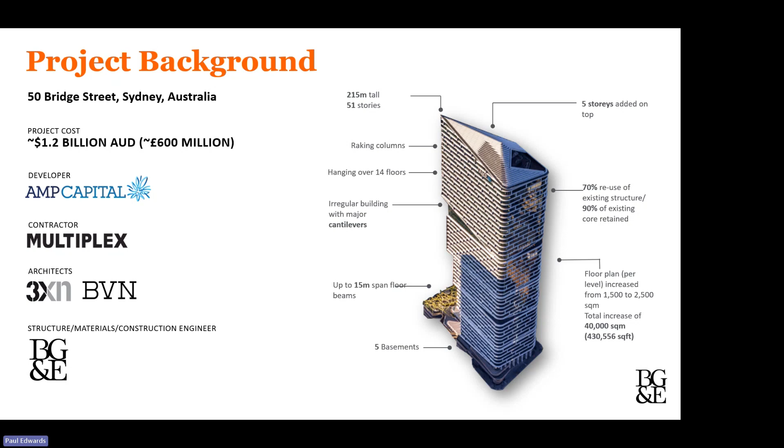So 215 meters tall at its completed state, 51 stories. And the project ended up adding about 40,000 additional square meters to the footprint of the building, whilst retaining 70% of the existing structure. Now, the existing building was completed in 1976 as 50 Bridge Street, always for, in effect, AMP Capital, so always for the same client who then operated it for the following 50 odd years. And you can see more or less the difference between the previous building and the now new building, to give you some idea.

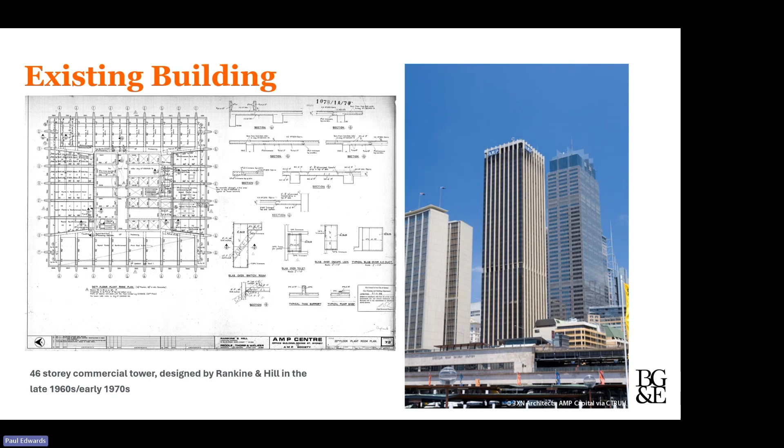So the existing building, what was, or is it? Because most of it's still in place. So the building was designed by an Australian practice called Rankine and Hill in the late 1960s and early 1970s as a 46-story commercial tower, again for AMP. And the structural form was a rectangular in situ concrete core with perimeter columns, in situ beams spanning between the core and the columns, and the floor plate constructed from planks with structural topping.

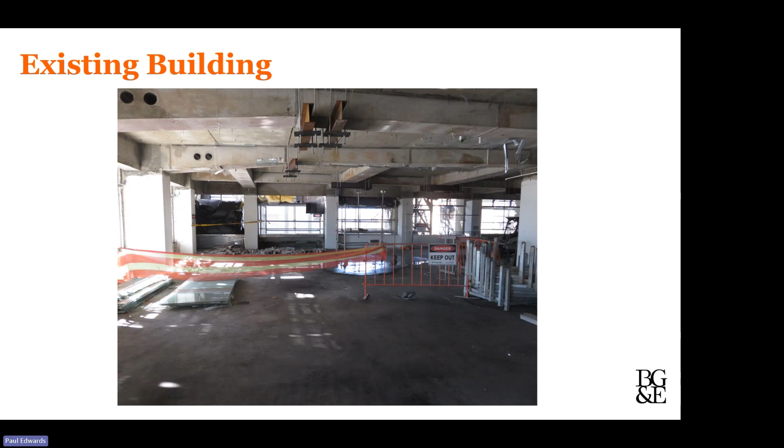Just some images to show you the condition of the existing building once the soft strip had been undertaken. First site. So you can see the downstand beams, you can see overall floor heights, giving an impression of those quite tight. Areas where some coring could occur to allow for services to pass through. And again, the further details are showing where the precast planks landed on the in situ beams. Some areas were double height to allow for an atrium.

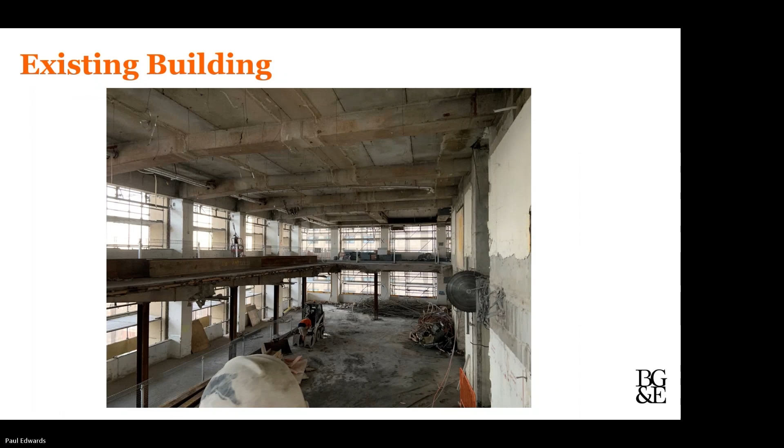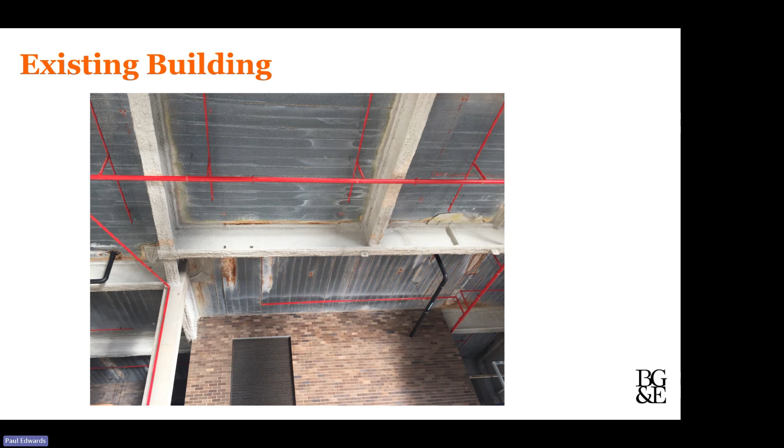And then the upper levels had some steelwork with metal decking floor slabs. You can see some mild water ingress, but given the life of the building over 40 years, nothing particularly significant. From those photos, I think one might take the impression that the overall condition of the building was reasonable. Didn't seem to be any significant signs of distress. We'll go into some of the findings as we get through this.

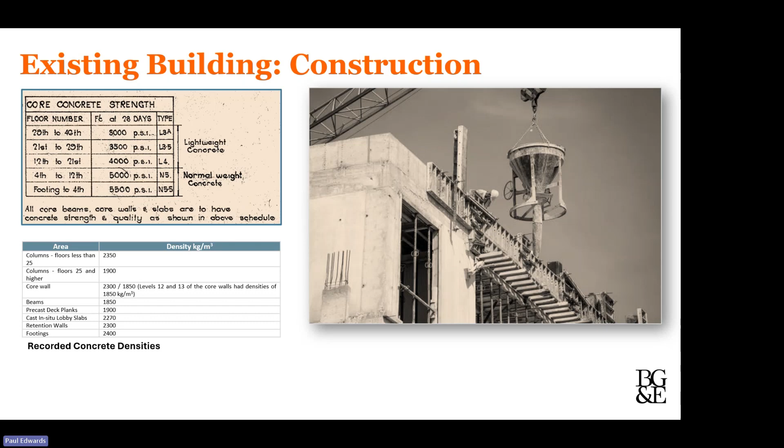So the original construction, now maybe when we're constructing buildings like this, we might be pumping concrete a lot more, but the actual tower itself was built using a kibble bucket process, example shown to the right. And the other interesting element was that the core walls changed both in design strength of the concrete, but also in moving from normal weight concrete towards the bottom to lightweight concrete towards the top. So you can see that there's a change in materials, and all of this would have been constructed with the use of a kibble bucket rather than pumping or anything else that we might be doing at the moment.

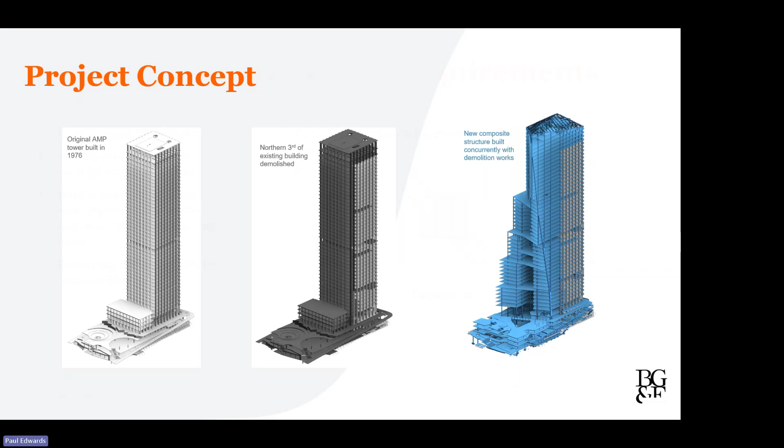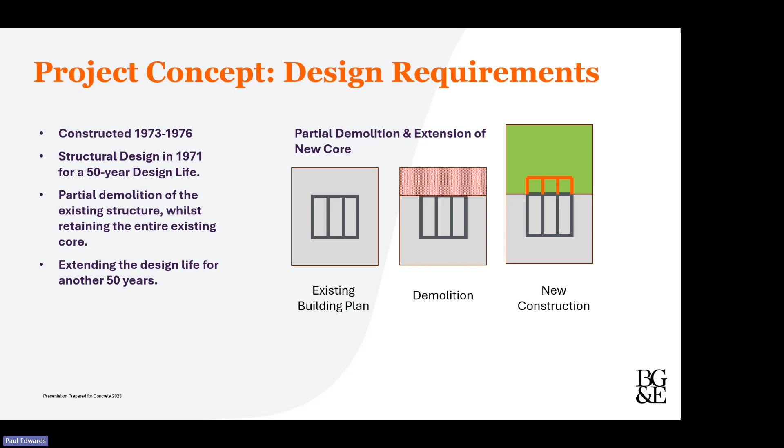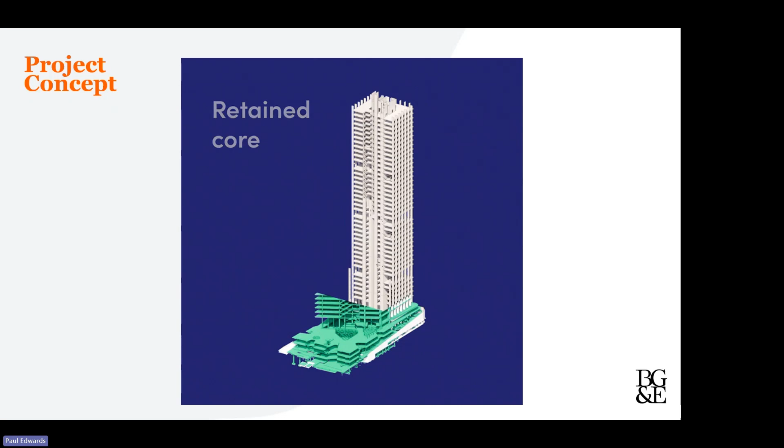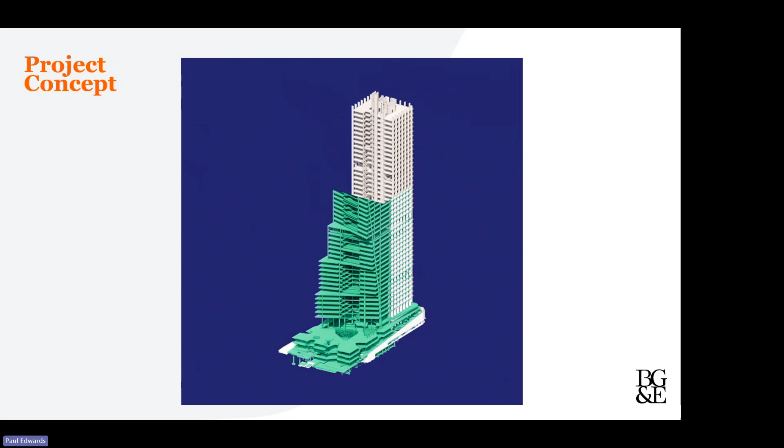The goal of the project, as well as increasing the floor area, was to give the building an additional 50 years of design life, and the retention involved extending the core. So I'll talk a little bit more about those two things as I go through. And again, not really a time lapse, but just a nice image of this overall project, just to visualize it a bit better. And I'll talk a little bit about some of the details about how we achieved that.

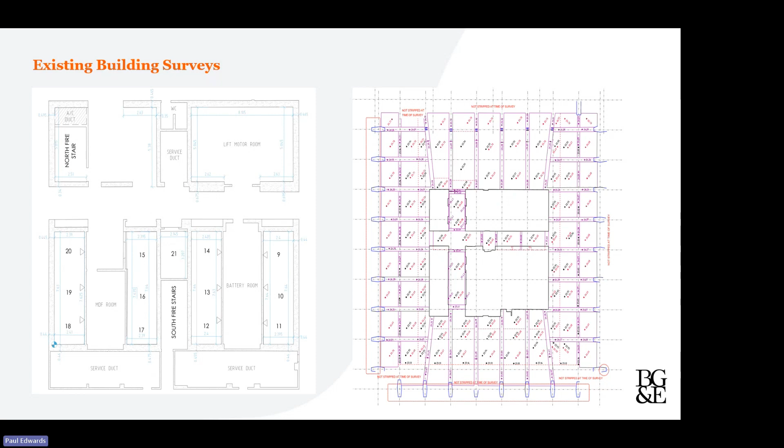So, existing building investigation. There was reasonable existing building information in terms of drawings available, but we took full 2D surveys of all the floors, all the building, and also undertook 3D point clouds. I'm not going to go into a lot of detail, but this survey information was used to help us develop an existing building model, which we used to develop and generate construction sequences and building movements. So it was quite an important first step, and I'll show some of that towards the end.

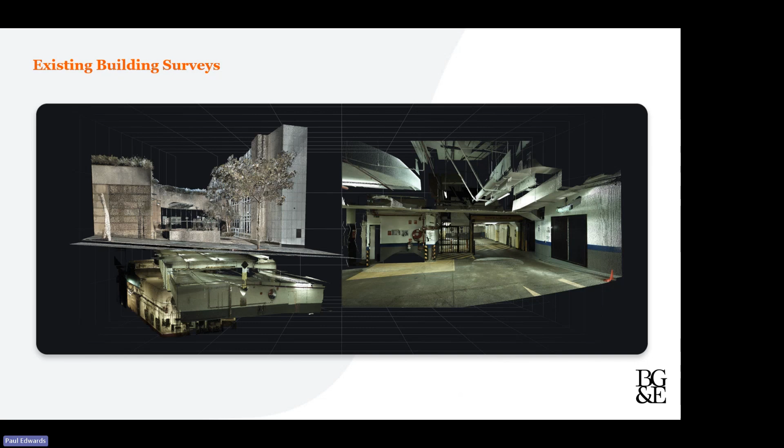If you were going to keep 70% of the existing structure from a building built in the early 1970s, a lot of the work necessary was to understand the condition and capability of that existing retained material. Typically, characteristic compressive strengths for a new build are determined using cubes or cylinders of the concrete mixes specified when they get brought onto site. In an existing building, that concrete's already there, so you can't store samples in relevant conditions and test them as you go. You've got to try and understand how close to what it needs to be it actually is.

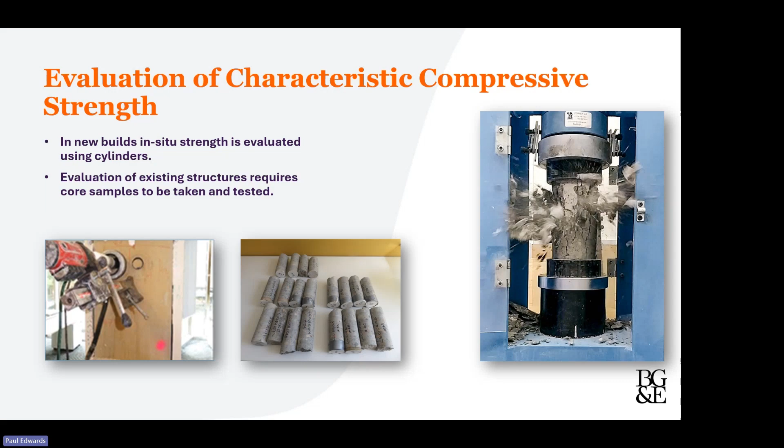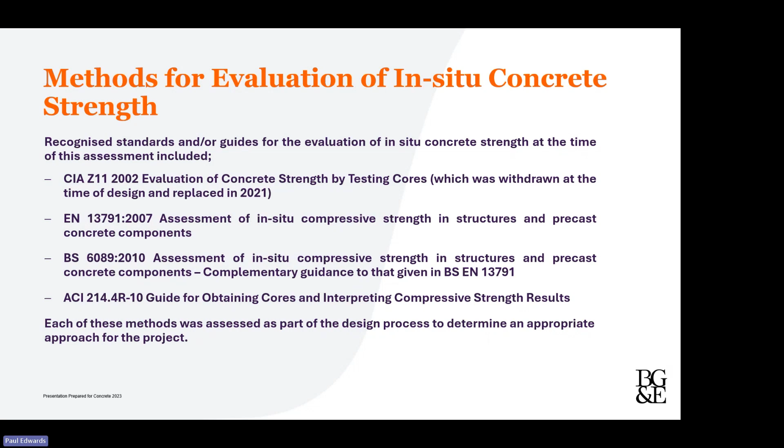At the time this was undertaken, and some of these standards have moved on, there were various standards available to the designer to understand the existing strength of the material. The design team evaluated these 4 codes for assessing the existing material, and having evaluated all 4 of them, the consideration was that the approach outlined in ACI 214 was the most relevant. The reasons are there on the slide, but it was felt that the ACI 214 approach offered the most sensible way of harnessing the existing concrete information gained from site investigation.

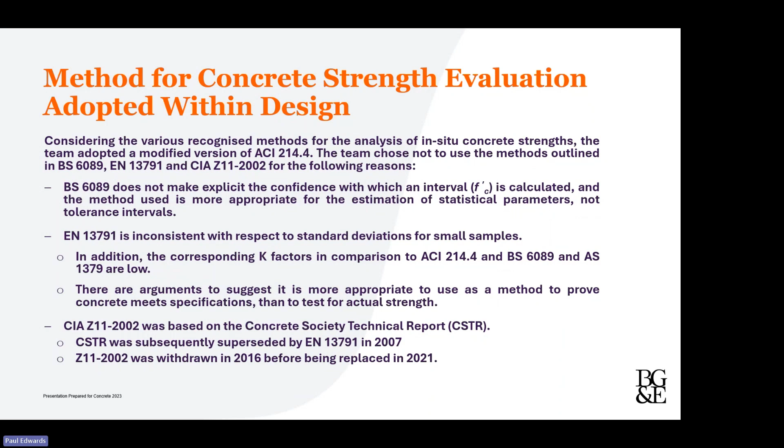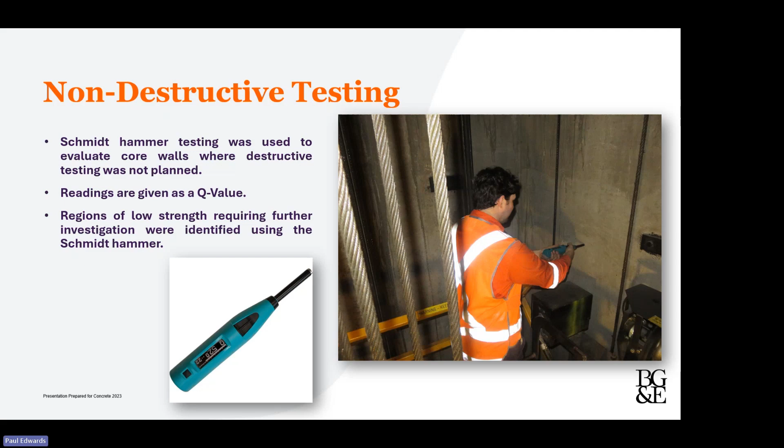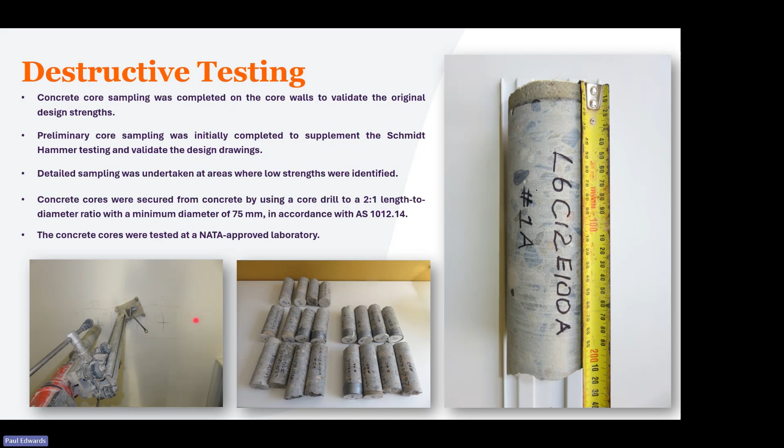Having identified relatively quickly an overview of the concrete compressive strength from the Schmidt hammer testing data, it was possible to then focus destructive testing. So representative concrete core samples were taken throughout the building, and further cores were taken following non-destructive tests to indicate areas of potential weakness. These cores were taken both to calibrate and to further identify low strength areas.

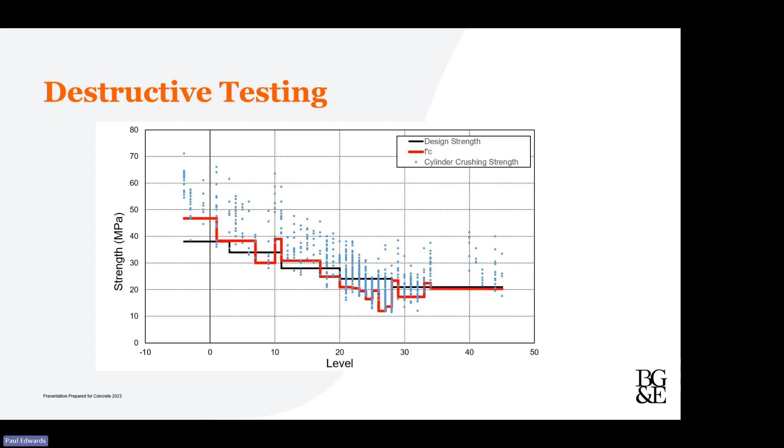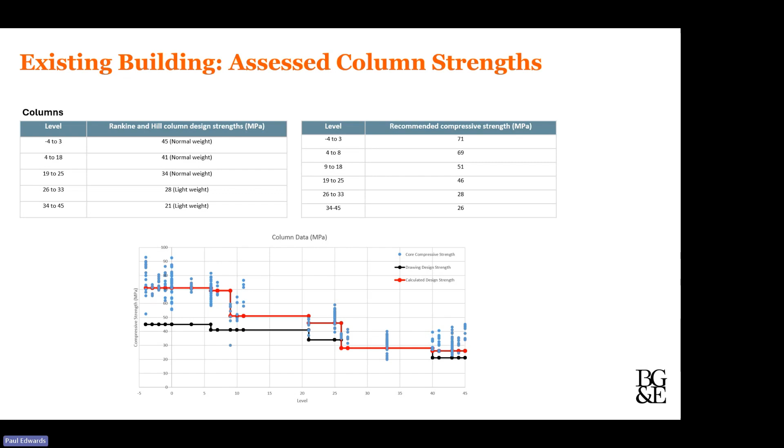This approach in general was adopted for all structural elements. So concrete columns were assessed, and you can see in the table on the left the original design requirements for the concrete strength, and you can see in the table on the right that actually determined by the investigation. And generally, as far as the columns were concerned, either at or above the original building's desired material properties.

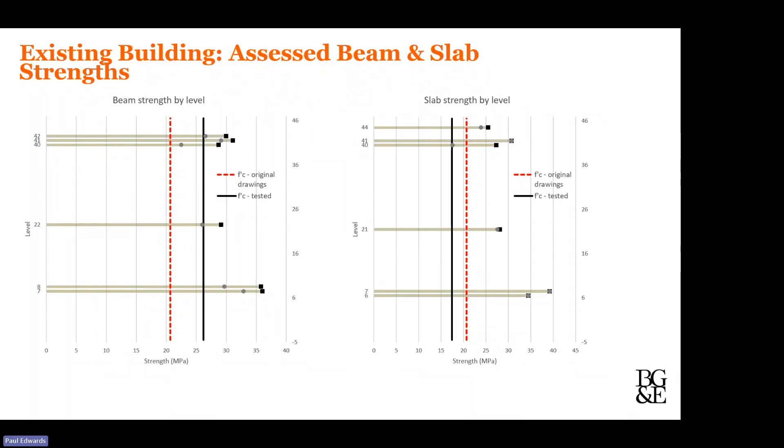Same story for beams and slabs. Generally, the existing material in the beams and slabs was found to be above minimum requirements, in some instances by a fair margin. But in terms of the cores, that core wall of which the whole core was retained, that story sadly wasn't carried through. And it's worth bearing in mind that all of this comparison with the original design strength is before any of the changes in load due to the new, taller, larger scheme come into effect.

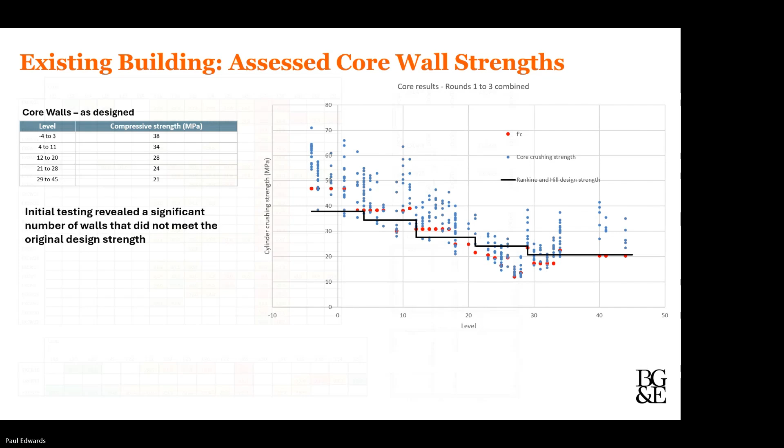So the investigation into the existing building revealed that actually the in situ strength of the material was below that identified as being necessary in the original design. And you can see in the chart everything below the black line, all those red dots below the black line, the f'c, resulting again from the ACI 214 approach, being areas where the concrete wasn't at the relevant level of strength. So the implications of that were relatively significant.

A zone in the mid-height of the building, where the compressive strength of the concrete isn't up to scratch, knowing that we're then going to add another 5 stories to it and increase the floor area with the associated increase in wind loads, for example. Quite a significant finding.

What then did we do? So it's worth bearing in mind that the first pass of both the non-destructive and destructive testing were done in a representative manner. So you're talking approximately, in terms of Schmidt hammer, 10 to 12 tests per wall, and then in terms of the cylinders for destructive testing that were taken out, maybe 1 or 2 on each floor level.

The decision was, if we'd have just left it at that in terms of trying to understand the existing material, the resultant costs to the project of reinforcing the core walls to achieve the desired strengths of the new build project would have been significant. You'd have been talking about 15 stories where each core wall would need to be strengthened either by steel jacketing in most instances, and maybe also, where tension was an issue, carbon fiber plating. The costs of that would have been tens of millions of Australian dollars, which is quite a large increase in the overall budget.

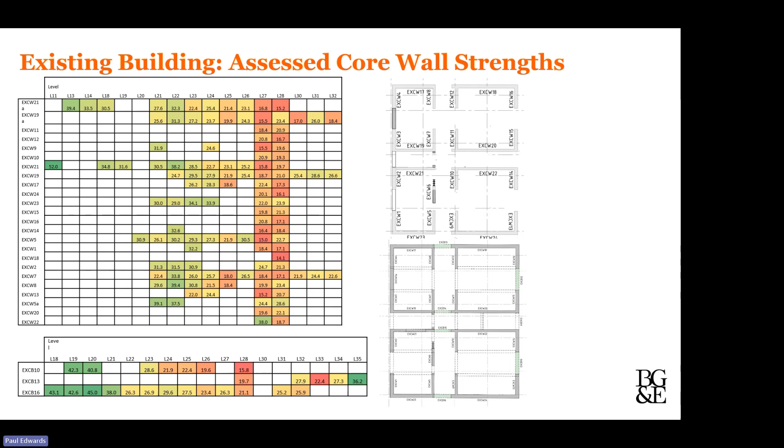So the decision was made to undertake a much deeper assessment of the existing concrete walls to try and understand exactly what the minimum level of intervention would be to achieve the desired overall strength of the existing core. And this table starts to pick up some of that more detailed investigation where you can see some of the identified destructive core strengths developed and starting to focus down a lot more on just a couple of floors rather than a group of 10 to 15 floors.

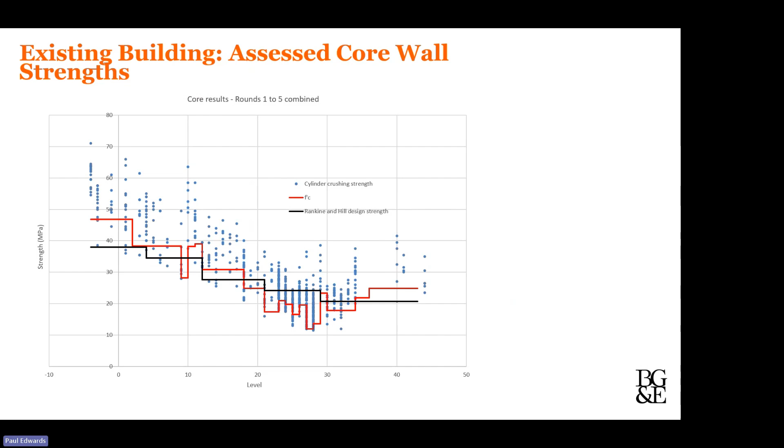And again, this is a similar repeat to the graph before, but with 2 more rounds of testing added to it. So just justifying further the areas where interventions might be made, and again honing in on those levels in the mid above level 25, where significant intervention might still need to be made.

And this comes back to some of the survey information, but in parallel to all of the investigations that were being undertaken, the overall design of the project was progressing, and as part of that, the structural engineers built an ETABS model of the existing building as a starter, and we're using that model both to understand the existing stress and strain and compressive loading of the building in its existing form, but then also to understand what the implications would be through the interventions proposed.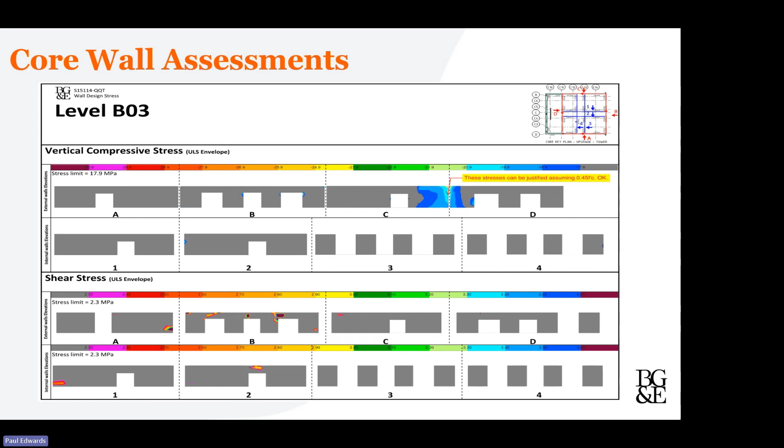Why was this? Having spoken to the team who delivered the project a few years ago, the consideration was really to do with the method of construction and the fact that that kibble bucket approach, although commonly used at the time and still used now sometimes depending on the scenario, can be harder to ensure quality control of delivery of the material, and then compaction and everything else. So it seemed someone was having an off day when they were pouring levels 27 and 28, where consistently the concrete supplied in the building was poor.

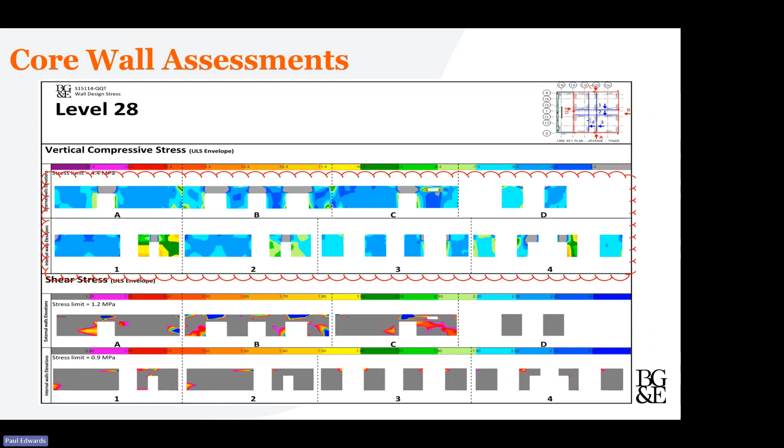There were some other issues found due to the non-destructive and destructive testing. The perimeter columns were formed from elements of precast concrete, which were then infilled. Well, I say infilled, but one common area of concern found was that the infilling of the precast around the columns wasn't undertaken very well. So there are large numbers of column voids found, and you can see some images here of the nature of what was actually found.

This was discovered by drilling a small hole into the precast concrete and finding that there were voids. Once the voids were found, it was decided to saw cut off one face of the precast concrete to understand the nature inside. And you see what you can see here. There's obviously been issues in pouring and compacting the concrete well, leading to significant voids in the precast column molds.

Which is obviously not desirable. This was simply rectified using, in effect, a concrete replacement for the new columns and then covering them up. Relatively simple once you've understood the issue is there to resolve, but it's worthwhile as a note for anyone engaging in adaptive reuse or existing building survey where there may be elements of precast concrete, to think whether that precast is there just to achieve an external finish and is hollow. And if that is the case, then maybe the internal is worth trying to understand as well, because there may be voids due to how that element was constructed.

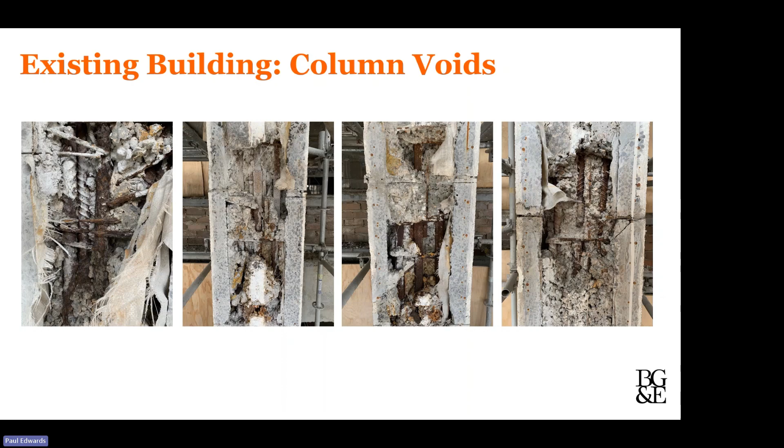Given that one of the requirements on the design team was to justify the building for a further 50 years, that meant it was necessary to understand not just the condition, but also how the building was constructed, and to understand how close it was both to the requirements of the incumbent design code at the time of its construction, but also in relation to what would now be considered relevant 50 years on.

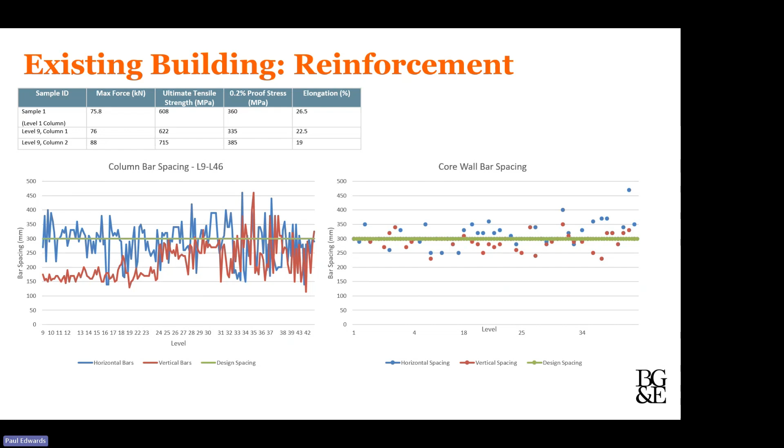So the team undertook assessments of the existing reinforcement, both to understand grade, but also to understand spacing and lap distances. This was done using calibrated cover meters for columns and cores, and generally in one or two areas, but generally everything was found to be acceptable and in accordance with design standards as far as that was concerned.

It was also necessary to assess carbonation rates. We want to keep 70% of the building for the next 50 years, so you want to make sure the concrete's still active in terms of protecting the reinforcement. These two charts, the one on the left, carbonation for the columns — the precast and the internal environment in which the majority of the columns were meant there's hardly any, practically zero, progression of carbonation.

Slightly different in the core walls, shown in the table to the right, where the majority of the predicted carbonation occurred after 100 years, bearing in mind it's 100 years because effectively 50 years in terms of the existing building, and we want to justify it for another 50 years.

In general, within the concrete cover depths of the existing, apart from some small areas toward the basement levels. You can see that third row, UBW2, where the intervention proposed there was again just a traditional concrete cover replacement for concrete repair, to locally achieve the required design life later on for those areas.

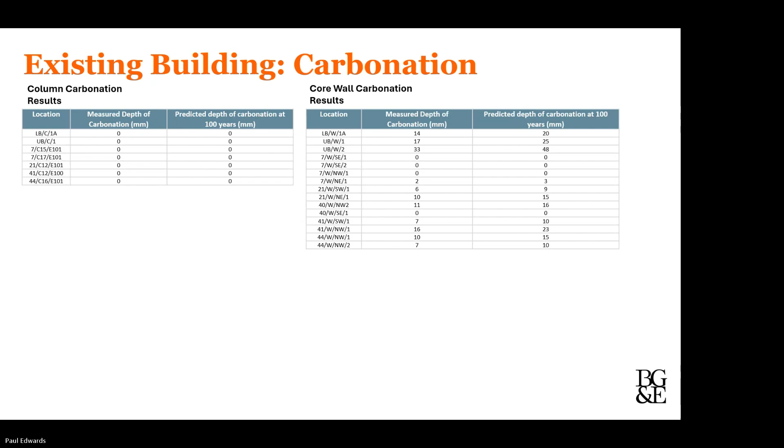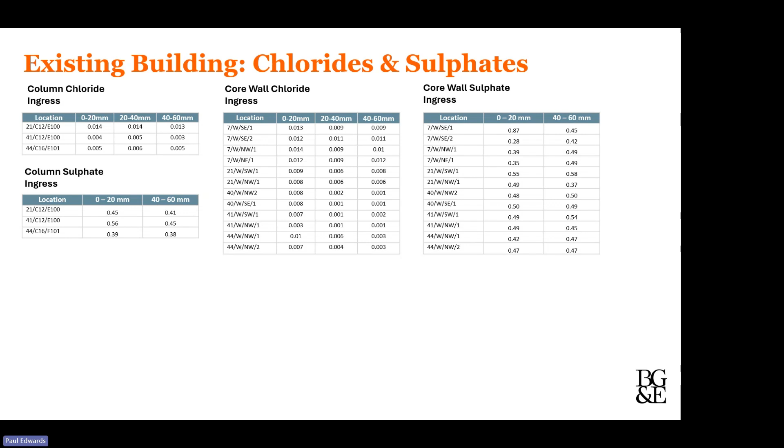Chlorides and sulfates were also tested for, and even despite the building being adjacent to the Sydney waterfront, no significant chloride ingress was noted, and no really significant sulfate ingress noted either. The rates of sulfate ingress were thought to be due to the actual original concrete mix rather than any atmospheric or ambient effect.

So given that nature, given that information found through the testing, what actually happened - just to take you back a bit to the actual existing building. On the left you've got the existing building floor plan with a typical floor plate, and the project also involved keeping two-thirds of that floor plate and demolishing the portion in dark grey on the left, and then on that same side, the north side of the building, extending out the core in dark blue, which you can just see here, and then obviously extending the floor plate as well.

Then you've got the whole conversation around time. One of the key considerations of this building is actually a chronological understanding, because the existing concrete has done the majority of its shrinkage and creep under the existing loading, whereas the new material that's going to be put in has all of that journey to go. So how do you manage that?

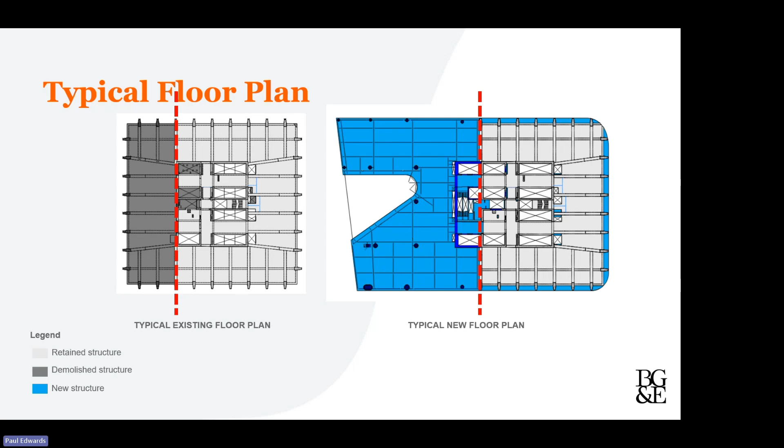And then the other act of intervention - you can't see it clearly on this floor plate, but at certain floor levels this blue floor plate was wrapped around the existing floor plate, basically every 10 to 15 floors, to grab onto the full core of the building to help resist lateral loads. So there's quite a lot of interface between new concrete and existing concrete.

As noted, that new concrete moves, and because the loading on the building changed, the existing core - the building had a larger floor plate with some significant cantilevers off to one side, which weren't there originally. So the distribution of tension and compression in the existing core also changed. And how was that dealt with?

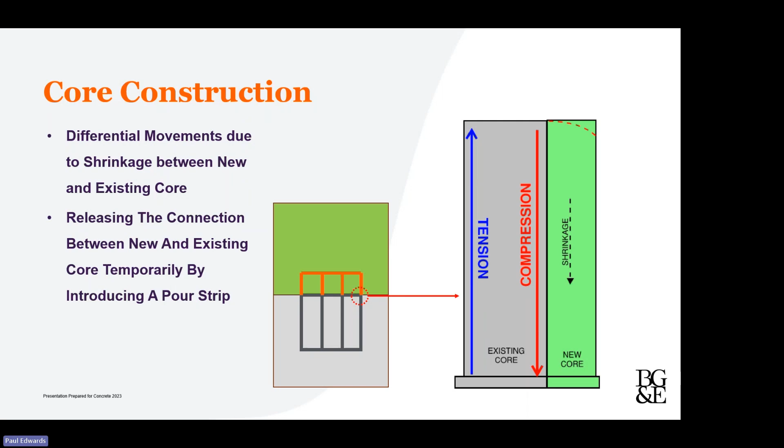That connection between the new core with its shrinkage and the differentials in creep between the two was dealt with by constructing a pour strip between the two. This basically ran all the way up the height of the building, with over 2,000 steel dowels going into the existing concrete, connecting and allowing a pour strip to then be put in place to the new areas of concrete. That pour strip was left out for 56 days before it was then cast up to join everything together.

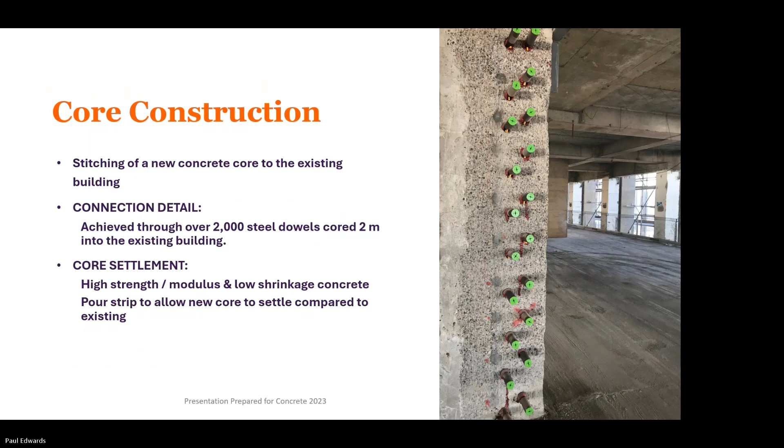Throughout all of this, as noted before, a comprehensive analysis of the existing building and then the new building was undertaken using CSI ETABS. This was in effect a 4D approach, so it also included time-dependent assessments, just to fully understand the movement and behavior of the building as we went through all of this, making full use of the knowledge of the existing material properties.

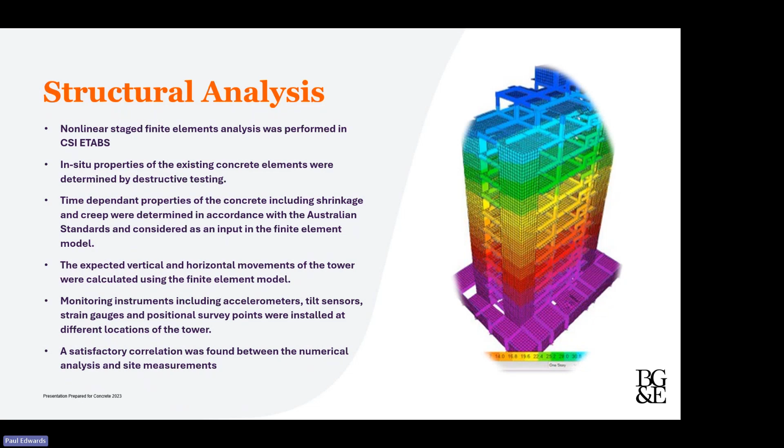This resulted in this model, which hopefully you can see here, of a 4D assessment, whereby we modeled the building from its original construction, modeled it in service for the length of time before the project came along, and then modeled its demolition. And then modeled the reconstruction. So you can see the stages being built, you can see it under loading, and then you can see it being demolished as agreed with the contractor, and the final steps, and you can see the elements being added in all the way to achieve the new building.

This is a combination of all the existing survey information that went into this, so all of the material properties understood and the geometrical properties understood from the survey went into building this model.

Really key to successfully develop the overall project. You can see on that section on the right, where you've got the new building in light blue and the existing in grey, with an indication of some of the issues there to be developed - in effect, time and movement.

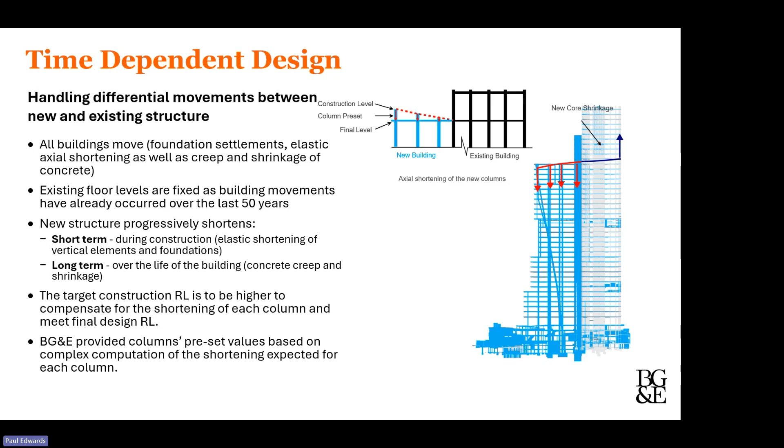This modelling enabled us to provide a series of presets to achieve the construction successfully. We were also able to model lateral movements. You've got the same construction sequence going on, and you can see how the building behaves when you take load off it, and then how it behaves when you put the load back on in a different way.

So the existing building being constructed, then start to demolish it - the building moves. Start to rebuild it, and the building starts to come back with the additional load and the cantilever. All of that movement needed to be understood, and it's not an immediate thing - it's heavily time dependent. We needed to understand the nature of the material and the shrink and creep behavior over time, but also during construction, which is very important to enable accurate construction to be undertaken.

Worth noting that this building had a number of issues, some of which I've touched on. There could have been an argument to demolish the building significantly or in total. I think it's credit to the client, AMP, that they were really keen to move in the most sustainable way that they could.

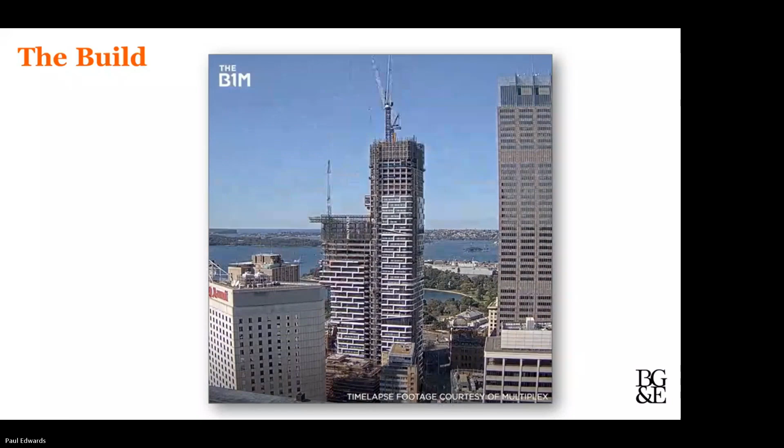The remainder has the cladding taken off, and the new cladding starting to be put back on. As on the left-hand side, the new build elements start to be erected, and you can note the relatively large cantilever that goes further and further up the building. And there we go - completion.

Now, I didn't say how - after having gone through in a little bit of detail - how the core walls were found to be significantly weaker than desired, and how this building, as you've just seen in that time lapse, changed significantly, leading to significant changes to the lateral load on the building, and how those areas were resolved.

What happened was that for those two key floor areas, levels 27 and 28, they were identified as needing steel jacketing reinforcement - basically steel plates applied to those core walls, but only on levels 27 and 28. If you take your mind back to where the initial investigation revealed that maybe 10 to 15 floors might have needed that level of intervention, this brought it down to only 2. It's quite a significant saving.

There were 28 walls that needed tension strengthening down towards the bottom of the south face of the core. This was due to the change in loads from the new profile of the building. Again, take your mind back to the 4D model where the loading - I'll just go back a couple of slides so you can see it.

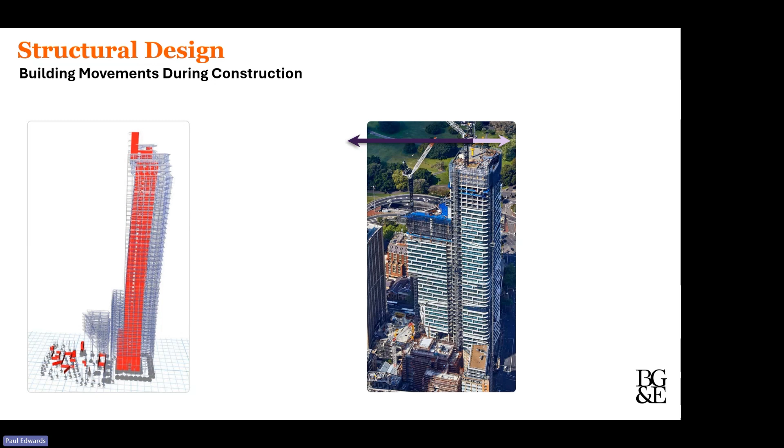So I think that's, in summary, the work done from a materials perspective, primarily on Quay Quarter Tower.

The project was highly commended and awarded several recognitions by CTBUH a couple of years ago. I think it is still maybe the largest adaptive reuse in the world - quite a grand statement, whatever. It's a great exemplar of what we can do with our existing building stock, and maybe how we should think about reutilizing a lot of the buildings we have out there, and some of the things we might need to think about when we do.